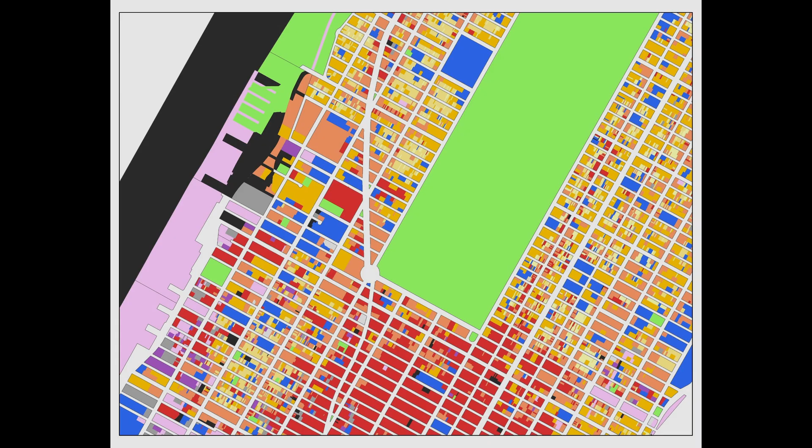I was an art history major. They say that wasn't the most lucrative choice, but I tell people you don't want a Rothko. You want a Seurat. Seurat was the pointillist, right? Very fine-grained. The more fine-grained, the more walkable.

This gets to the fundamental new urbanist story, the story I heard Andres give in 1989 at the Boston Museum of Fine Arts, and I turned my whole career from thinking I was just going to be an architect, which is my hobby now. I'm unlicensed, and I build buildings, which is wonderful. There's no risk. Someone else stamps them. But I thought I was going to be an architect, but I heard Andres talk, and he gave this talk that just blew me away.

And actually, it became the book Suburban Nation, which is the first book I wrote with Andres and Liz. But it was the basic towns versus sprawl discussion. And even back then, he showed this picture of Newburyport, Mass. And he said, there's only 2 tested ways to make a community. There's 1,000 ways to make a city, but there's only 2 ways that we've tested by the thousands. And that is the traditional neighborhood and suburban sprawl. The traditional neighborhood is defined as being compact, diverse, and walkable.

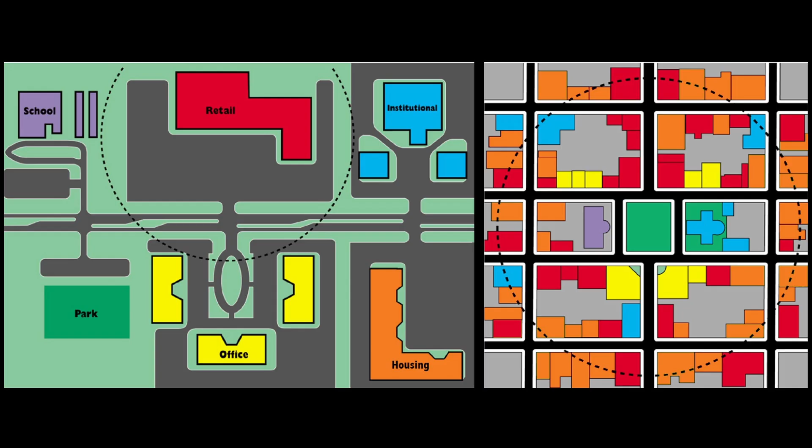So that's the model that makes walkability possible. It's the model that exists in your downtown. And then when we look at downtowns in this first category, the useful walk, we ask this question: what use or uses are missing or underrepresented?

It's certainly the condition in the US more than almost any other country, particularly because we have this concept of the CBD, the central business district, that housing is what's missing in your downtown. Jane Jacobs observed Wall Street back around 1960. She said Wall Street has 400,000 people coming to it every day. It does not have one great restaurant, does not have one great gym. Why? Because it's missing what she called time spread.

A great restaurant or a great gym needs a dinner crowd as well as a lunchtime crowd. So then she added, you can't rely on bringing people downtown, you have to put them there. In other words, all these highways that Robert Moses was building, ostensibly to get people in and out of the city, was just getting people out of the city, and you really need to put the housing in the downtown.

And that's what cities and towns that want to thrive now are helping to do. So here in Des Moines, where I've done some work, the mayor managed to get from 2,500 units downtown to 10,000 by 2020, over 20 years, basically by saying if you invest in this building, if you renovate a building, if you build a new building, the taxes won't go up on it for 10 years. And then additionally, you threw in 10 more years of TIF, tax increment financing, to support the success of these projects over the next 10 years.

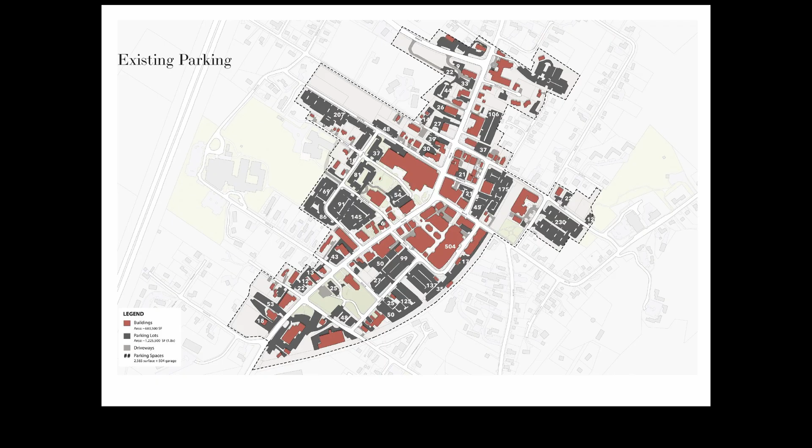The Freeport Downtown Vision Plan identified—everything in gray here is parking. You have a lot of parking, actually quite well located, mostly off the main street. You're already doing a lot of things right, and this is one of them. But chances are, if this system is managed properly, you probably don't need too much more.

And I was kind of surprised to see, I do not know a main street, and bear in mind I'm a little ignorant, so they could exist, but I do not know a main street as nice as yours that has free parking on it. And the charging for parking, it's not a revenue generator. It's not, I mean, it is. You'll generate a lot of revenue. But the reason to do it is to have that one open space on each block that is available for the big spender. I always say Daddy Warbucks should be able to find a spot near the furrier, right?

But Donald Shoup talks about a 15% vacancy that you get by charging the right price. We generally recommend in cities, and this is not part of our project, but because I'm here to talk about the walkable city in general, I just want to share with you that we recommend in other places that you charge enough for parking to get those open spaces in the most attractive locations. And of course, you have the garages located peripherally, or decks, or surface lots as well, which is a good place to start.

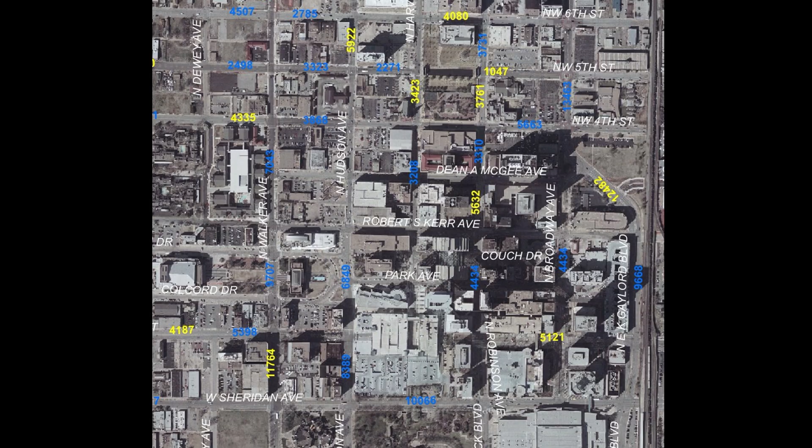And we looked at the car counts in the downtown. And this is what we in Stantec and your DOT do when looking at how big a street should be, you look at the car counts. Oklahoma City was an extreme example. I can tell you though, every city, every town has some streets that have more lanes than they need. We know that a 2-lane street without turn lanes can handle 10,000 cars per day. That's something engineers don't disagree on.

We looked at the car counts downtown. These were all 4 to 6 lane streets in the downtown with 2-lane to maximum 3-lane demand. So this 6-laner could have been 2 lanes. As we completed that study, Devon Energy decided to invest in this 50-story tower in the downtown. It generated $200 million in tax increment.

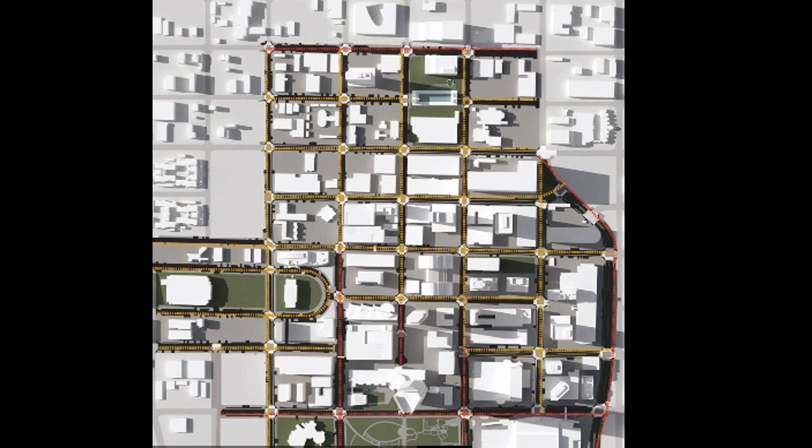And they said, how do we spend that money on the same day that we handed in our plan? And so they decided basically to rebuild 40 blocks of downtown streets from building face to building face. My job was the curb to curb of these streets. And I was able to remove 1/3 of the driving lanes, double the amount of on-street parking, which we'll talk about how positive that is, and add a bike network in that extra space that we gained.

In this case, with this project we're working on here, we're looking at probably both. We're looking at hopefully restriping in the short term, so we can test, demonstrate, and enjoy the safety benefits of having these changes quickly. But because it's a state DOT project and because there are federal dollars available and state dollars available, I believe the intention is to rebuild as well. And we can talk more about that.

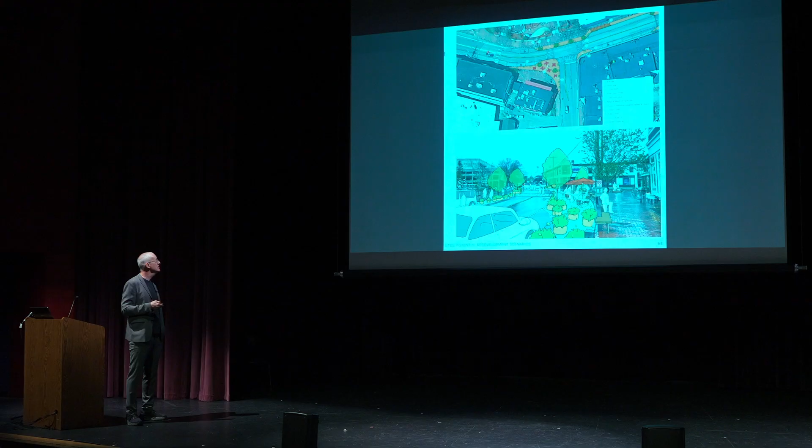And actually, I was going to draw this until I found it in the downtown vision plan that you guys recently completed. But this is pretty much exactly what I would have drawn. Russ Preston's team, who did that plan at Principle, is a firm I very much admire. And this shows a tactical solution, a temporary solution. But the ultimate rebuild of this street could make a really special spot here in what I feel is your heart. It's where the road bends.

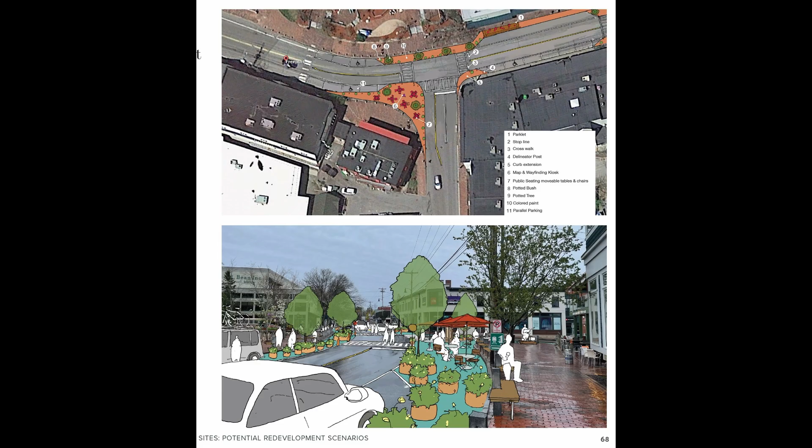It's funny, Bow Street is the road that doesn't bend. It should be called Arrow Street. But on Bow Street, when the street bends, that kind of designates the one moment of change and centering, I think, on your main street. And so we would love to see, and we will propose, an outcome like this in this location. They've even kept an extra lane here that may or may not be necessary. My point isn't to say that we know which lanes can go away, but just to say that we look for the lanes that can go away. So that's number of lanes.

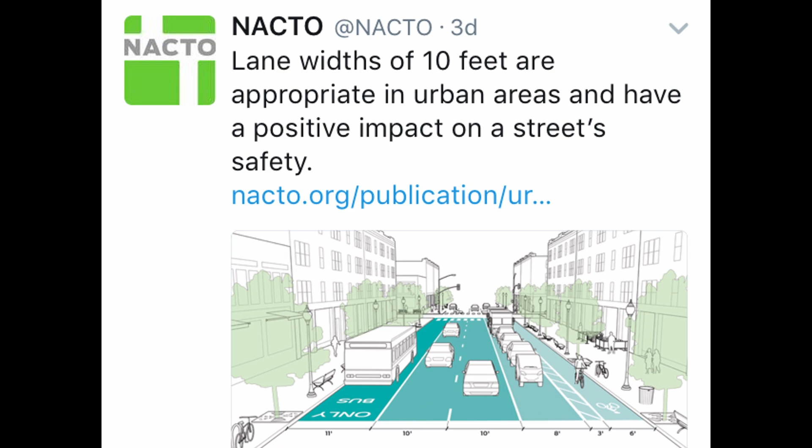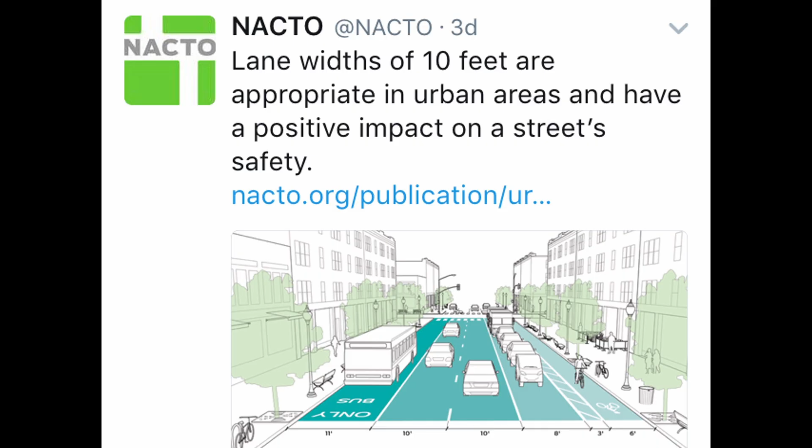We know a 12-foot lane is a highway lane. We know a 10-foot lane is an urban lane. NACTO, the National Association of City Transportation Officials, which is the city or town equivalent of AASHTO, says 10 feet is an appropriate standard. Most DOTs require 11. 11 is not the end of the world. Maine DOT will allow 10 in certain circumstances.

And what I find interesting on your main streets is that, actually providing the changes that we want to see, there are some streets which just have a width where you need to have 10-foot lanes, or you can't fit in that extra thing. You can't fit in the biking, you can't fit in the parking. Here the streets are wide enough where I think this 10 to 11 discussion doesn't necessarily need to happen. But certainly 11-foot or narrower, 10-foot is ideal. You can see how a 10-foot lane is big enough.

You have a lot of lanes that, because of a number of factors, are 13 feet, 14 feet, 15 feet wide, and those can be put back to 10-foot or 11-foot lanes by putting parking or other things in the roadway. Parallel parking. People say, oh, you're the walkability guy, you must hate parallel parking. I love parallel parking. Parallel parking is an essential barrier of steel that protects the curb from moving vehicles. It makes a curb habitable.

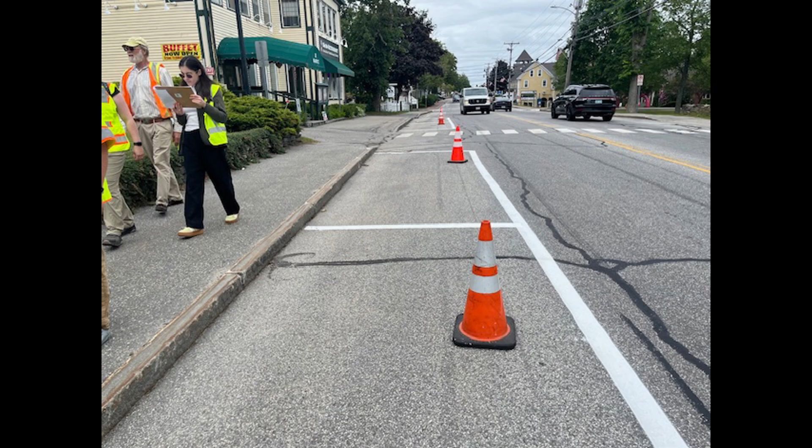So we notice a lot of spaces that maybe used to be loading zones, that might be a bus stop, but you do not have 150-foot long buses, that could be rededicated to parallel parking. Lots of no parking spots we noticed. Of course, if you can replace parking with a parklet with dining in it, go right ahead. Notice the Jersey barrier is what makes this work, right? If you have a Jersey barrier, you can sit up against the travel lanes. And then again, because we were here today, they striped 4 new parking spots during the day. So they didn't even know what I was going to be talking about.

And then, of course, the other part of this picture are street trees. Street trees were once considered a problem by street engineers. They were called FHOs, fixed hazardous objects. And in fact, people felt they made streets more dangerous until the studies came out of Florida showing that a street with street trees is safer than a street without street trees because they slow cars down, sometimes dramatically. But better to hit a street tree than to hit a pedestrian. And when you line up the street trees, of course, you get that wall between you and the traffic.

We have wires here. They can get in the way of street trees, but they're rarely on both sides of the street. If there is a rebuild, the rebuild should include street trees. You don't have many street trees now. If you care about climate, if you care about heat islands in the summer, if you care about the current loss of wildlife because the critters have nothing to eat, street trees are really important.

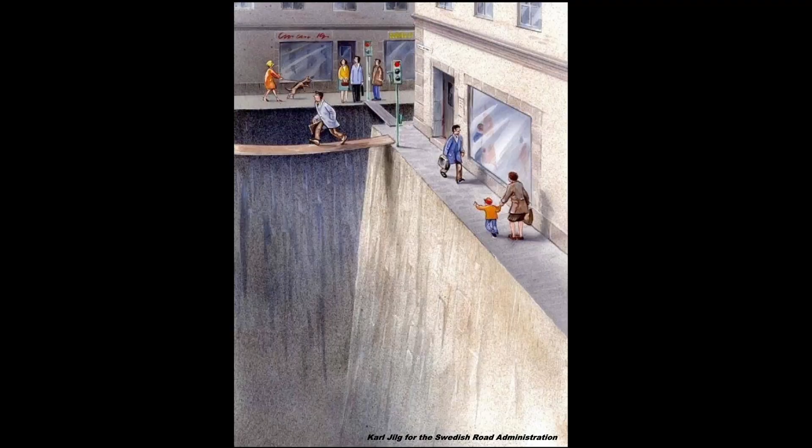Traffic signals. We are over-signaled in America. And the only reason I say that is that the data are very clear saying that signals are dangerous when you can have an all-way stop sign. This is the classic study done in Philadelphia. They changed the rules, and actually they had to take out 199 signals. Almost all of them were replaced by all-way stop signs at the intersections.

Crashes went down by 24%, and severe pedestrian injury crashes went down by more than 2/3. Why? Well, traffic engineers in Philadelphia believe that it's a local habit to speed up to beat the red, just in Philadelphia. That is a factor, but if you just think about it. It took me a while to think about this, and then it was obvious that at an all-way stop sign, only the most flagrant scofflaw is going to go through that thing at more than 5 miles an hour, right? But at a signalized intersection, half the people all the time are going through it 20, 30 miles an hour. So it's just a much more dangerous condition.

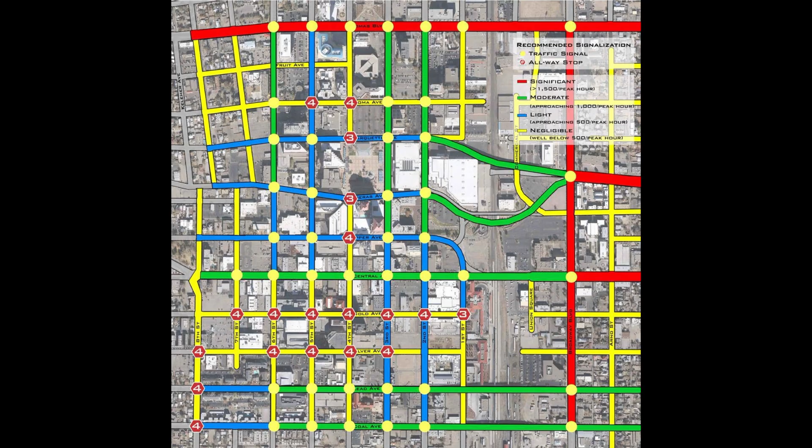This is the good city, right, in America. The biker's going the wrong way, the wheelchair user's comfortable. That's what happens at an all-way stop intersection. This was our plan for Albuquerque, where we identified where the smaller streets were meeting the medium streets and vice versa. And we identified 17 locations where they could remove signals. And they removed 9 of them.

The signals got bagged. Then there was a rebellion, and the stop signs got bagged because people hate change. Then there was a counter-revolution, and they bagged the signals again and brought the stop signs back. And this is what's fascinating. City reinstalls downtown stop signs to reduce traffic pileup and speeding. And what they learned, which is not what I knew, was that you get through a downtown faster stopping at every intersection than you do sitting, waiting at lights. And so actually cities and towns can not have a traffic problem.

And the idea that we could replace some of your signals, perhaps, we have to do the counts, it's very clear, there are warrants and there are rules, but we have to do the counts, and maybe we can find a spot like at West Street where this signal could be a stop sign. But there's also some other spots, like where Bow meets Main, that if that was an all-way stop, it would just cause a little pause as people come through town. We have to look at the counts again. It would also allow you to get rid of lanes, because at an all-way stop, you don't need left turn lanes. Everyone just takes their turn. So that's fascinating to us.

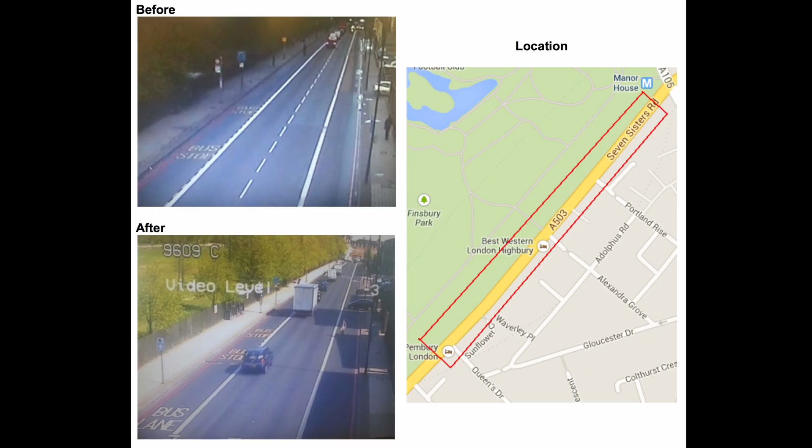When you remove the center line from a street, and this points to the whole Vision Zero idea of making drivers feel uncomfortable, people go 7 miles an hour slower, right? Crazy. But the fact that the 2 yellow lines make you know that no one's going to hit you is why some of the nicest main streets in Maine are without center lines. And here, I'm not challenging the DOT. We're all in this together. Where's Matt? They have certain rules they have to follow. But I wanted to raise it so we can at least try. If you're getting federally funded, you have to keep the center line. But you can paint it with house paint, and it just fades out, goes away.

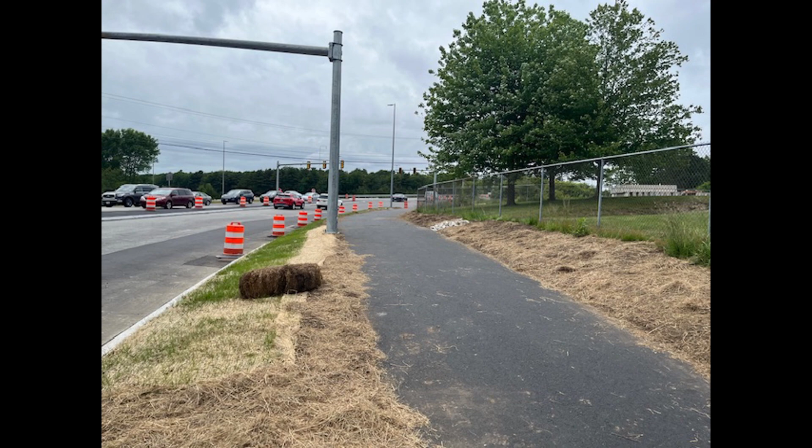The beginning is to have a buffer, maybe some sort of vertical separation. But the real way to handle it to the south is what you have already planned: the mixed use, the shared use path, the SUP, that's 10 feet wide and out of the street. Because down here south by Pine Street where the interchange is, it's very heavy, fast traffic. The plan is to take what I just showed you, cross the street here, and then it becomes this raccoon trail through the dirt. But the plan is to make that continuous all the way to where Main Street becomes what I can show you here in your active living plan.

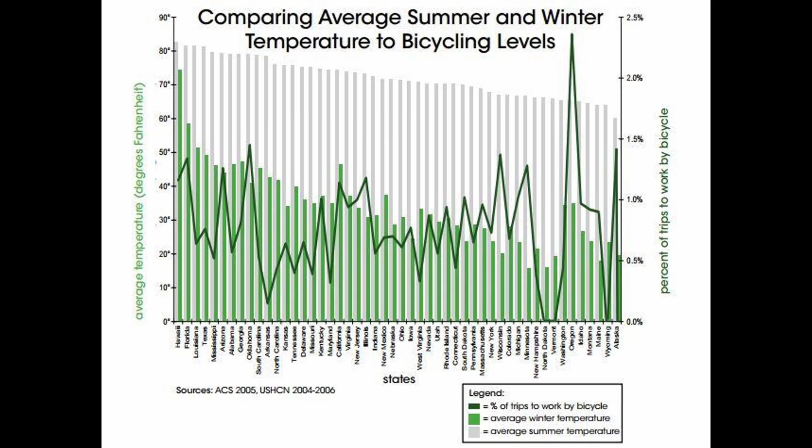This graph goes from the hottest state to the coldest state, and you're there, I guess, Maine. From hottest state to coldest state, the line that bounces around with no relationship to climate whatsoever is bike use, because it's principally infrastructure that determines who cycles. So climate matters - certain times of year you may not want to bike - but there's no such thing as bad weather, just bad gear. And certainly for the majority of the year, we could have a good biking population.

Okay, I know I'm only half done, but the last two categories are very quick, so we're getting near the end: the comfortable walk and the interesting walk.

The comfortable walk is maybe the most counterintuitive of the topics, because we all love climbing Mount Katahdin and getting the big distant view. But actually, evolutionary biologists tell us that all animals, including humans, are simultaneously seeking prospect but also refuge. Prospect means you can see your predators before they attack you, but refuge means your flanks are covered. The best places perhaps have both prospect and refuge.

A plaza is only as good as its walls. A street is only as good as its edges in terms of creating spatial definition. I like to say you can't have a place unless you have a space, and you can't have a space unless you have good edges that make you feel like you're in an outdoor living room. We've been talking about it for a long time.

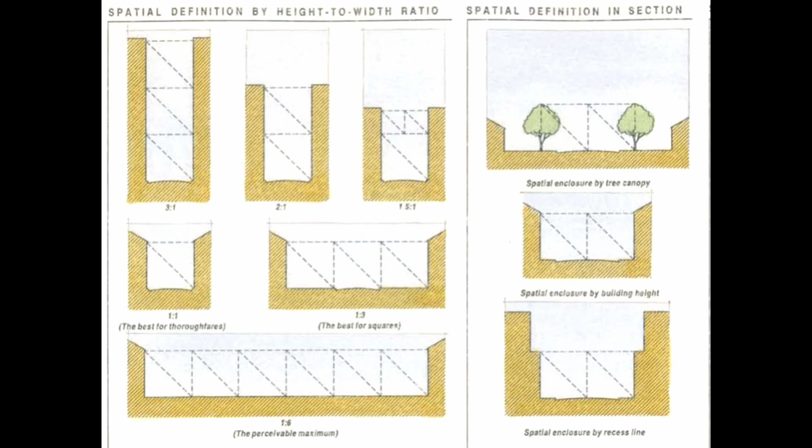1-to-1 was the Renaissance ideal. 3-to-1 can be cool. Beyond 6-to-1, which is not so different from parts of your Main Street... you do better, you're closer to 4-to-1 in the best spots. But beyond 6-to-1, you don't really feel contained anymore, so you're less comfortable in the space.

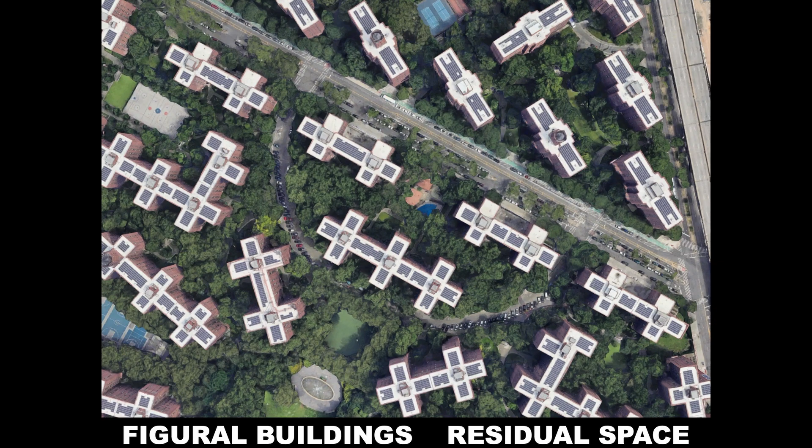And of course, the skinnier you make a street, the more the property is worth. The less you invest in road width, the more your properties are worth.

Like many cities, you tore down some of your taller buildings. I understand there's a bit of a consensus that we can get a bit taller again, because that's what we were historically.

But you still have some pretty good sections, where you have taller buildings on both sides. This might be just 2 to 1, it's not that wide. So the better parts of your Main Street feel like this, and of course the worst parts are where the buildings are allowed to get behind the parking lot.

And there's the rule in your comprehensive plan, the last one, that says avoidance of strip development. Strip development probably means something different to you than what it means to me, but I define it as the parking lots are in front. That's really about being comfortable in a space, that's the first thing to avoid.

Then finally, by the way, you have codes now, and you've done a great job on your Main Street. I haven't been back here in decades, back to Freeport, and it looks a lot better than it did last time I was here. I presume you have rules in place that are not allowing this already, but we want to make sure.

No one wants boring, long facades, repetition. Mayor Riley in Charleston, mayor for 40 years, taught us it only takes 20 feet of building to hide 200 feet of garage. So if you're building any garages or having any surface parking lots in your downtown, just hide them, as you currently do pretty well. Hide them behind buildings, between them and the street.

And of course, public art. Blank walls are— I used to work at the NEA, and we funded a lot of public art, and I would always say, let your public art budget be remedial. Use it to remedy urban boredom.

And then finally, have you guys ever met Ed McMahon? He's not the one on Johnny Carson. If he's alive now, he's probably 100. Ed McMahon worked with me for many years at the NEA, and we would bring him to small towns.

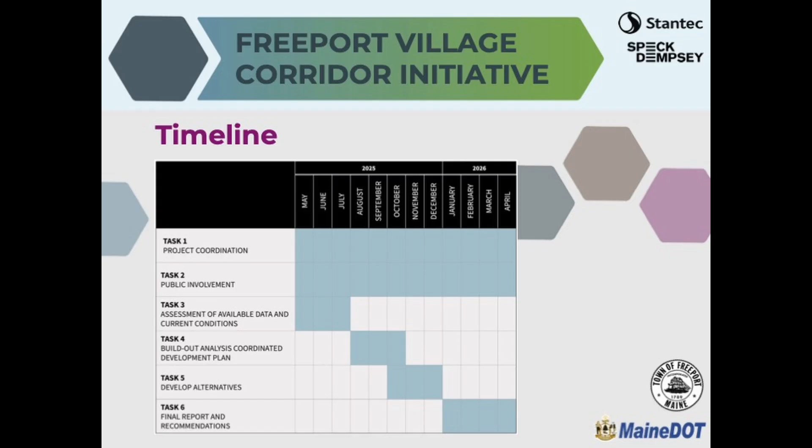These are good, and we're going to spend our initial time figuring out the right approach, what's been said. We're then going to spend some time figuring out what the future might look like. Some of that is how much development could happen. We want to pressure test that. When you start to add new development, new housing, ideally all of those different magnets, there will be some additional trip making. Hopefully more and more of it is the walkable kind. We want to test that out and then test it on the actual roadways.

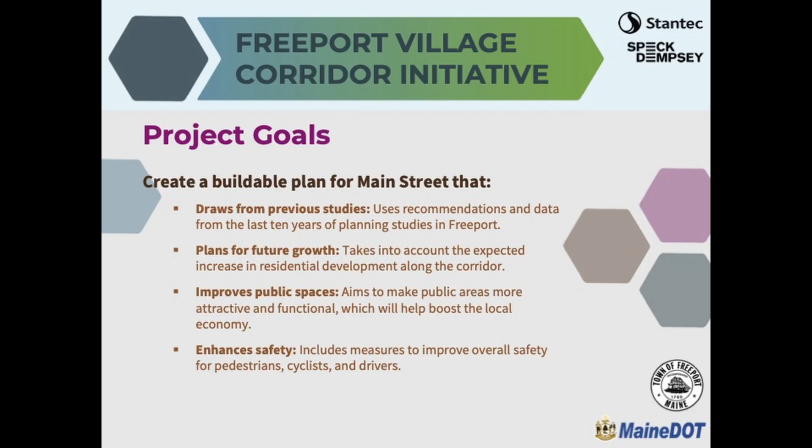Because one of the most important things here is, as Jeff has pointed out, there's a lot of space that we could actually turn into driving space. But your goal listed here on the bottom is to actually make public spaces. We don't want the street to necessarily carry more cars. We want this environment to be able to carry more space for other things. So we'll be doing that testing this summer.

We'll hopefully come back to you in the fall with some ideas. Our ideas are going to be born from everything we've heard thus far, but we want folks to say, I like this approach to it a little bit more, or I'm not so sure about getting rid of that lane, Jeff, how about this lane instead?

Or, I really want more landscaping and trees more than I want parked cars. Or maybe we really do need that on-street parking, Jeff, let's do that. Those are the types of trade-offs we want to discuss with the community, with the DOT, and with the town staff, and be able to come together with a consensus plan in the late fall and winter, something we can package for the beginning of next year. It's a 12-month process. So we have some time, but we have a lot to do.

That's great. I know, as Matt mentioned, we had a really strong response when we put the request for proposals out. There were a lot of firms with a lot of skills and capacity. They understood what we were trying to accomplish, but I'm really glad there was strong consensus to pick the Stantec and Speck Dempsey team.